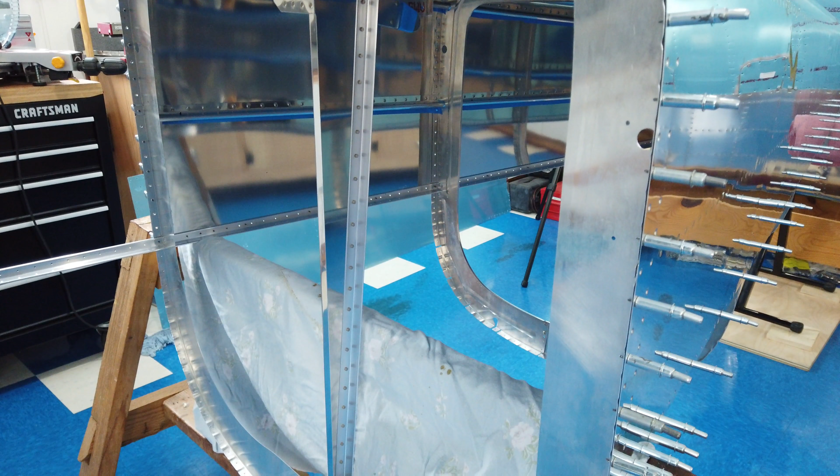Prior to doing that, I riveted this bulkhead in place. Let me see if I can get my hand in here. This bulkhead here, I riveted this in place, not along the edges, just this center part here. There's a brace that runs up in here. I riveted that to the skin. You might be able to see that here. I don't know if you can see those rivets. There's a line of rivets that run through here. I riveted that, and I also did some riveting in this area in here.

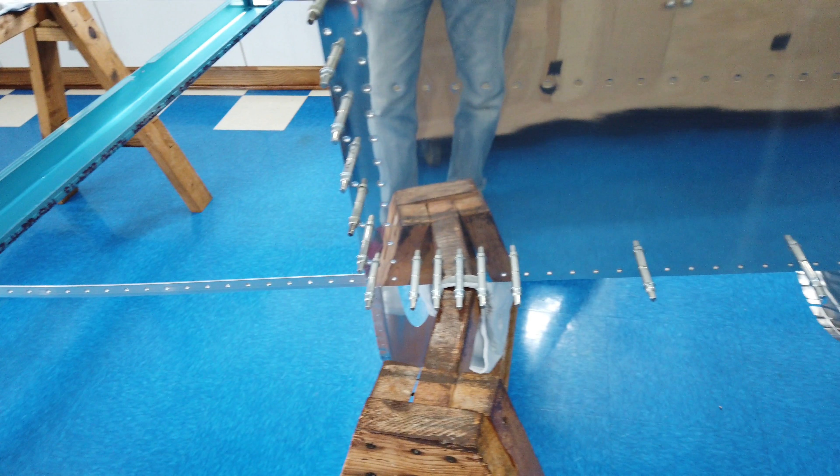So that was done first after I cleaned everything, which I've already talked about with the blue tape and the cleaning. Then I machine countersunk the longerons, which I may or may not have talked about. I think I have. I had done the machining on my drill press. Then I put the longerons into the tail cone, and then I flipped the tail cone upside down, which is how you see it currently, of course. And then I started on the center section.

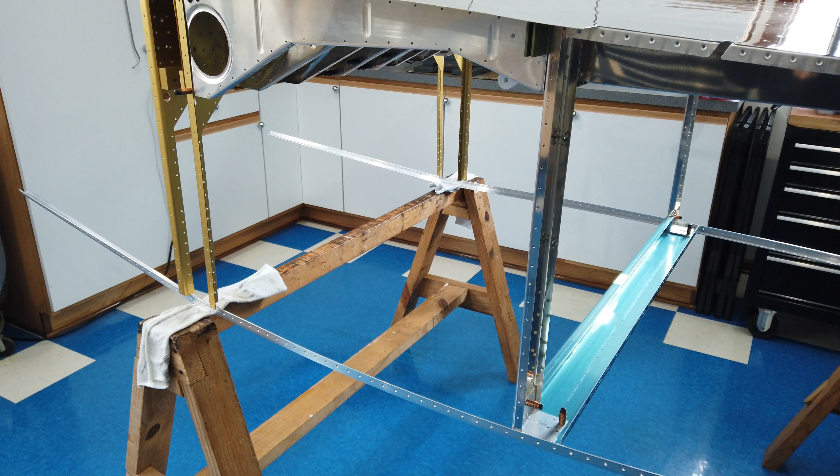Now remember, I talked about having notes written all over the place. So I paid really close attention to my notes, cleaned everything really well, made sure that all of the holes that were drilled when the skin was in place, all the match drilled holes, on both sides of the hole, those were deburred. Whatever notes I had written, tweak this, tweak that, I made sure I took care of all of that. I checked and rechecked the plans, both the drawn plans and the written instructions, just to make sure I hadn't forgotten anything.

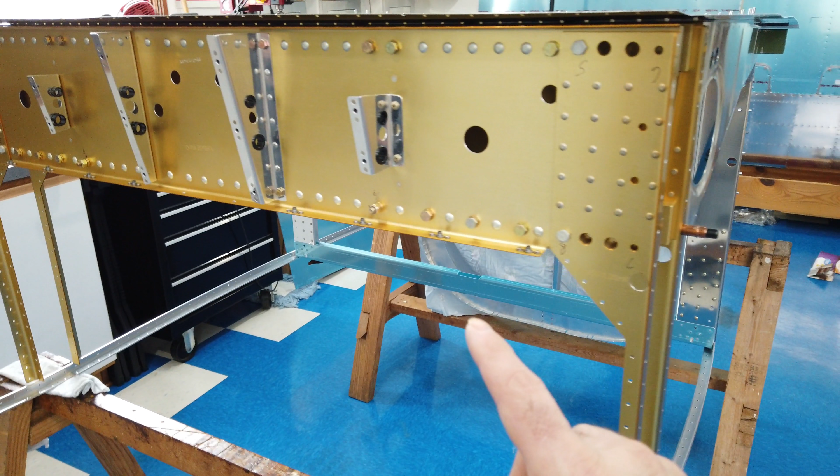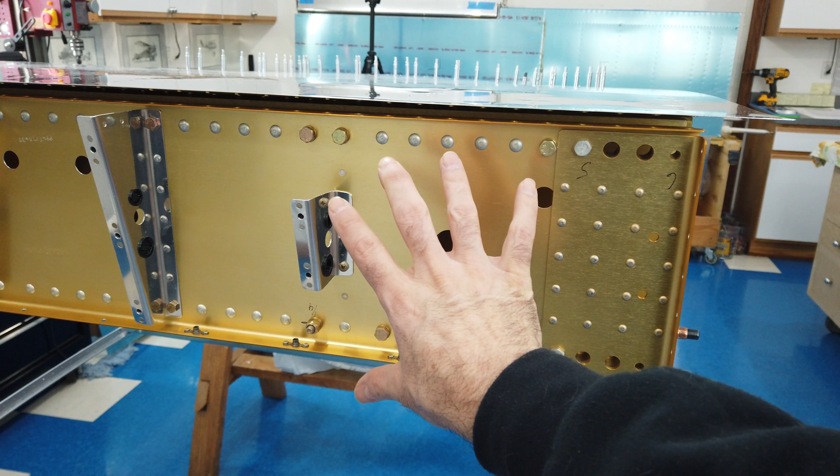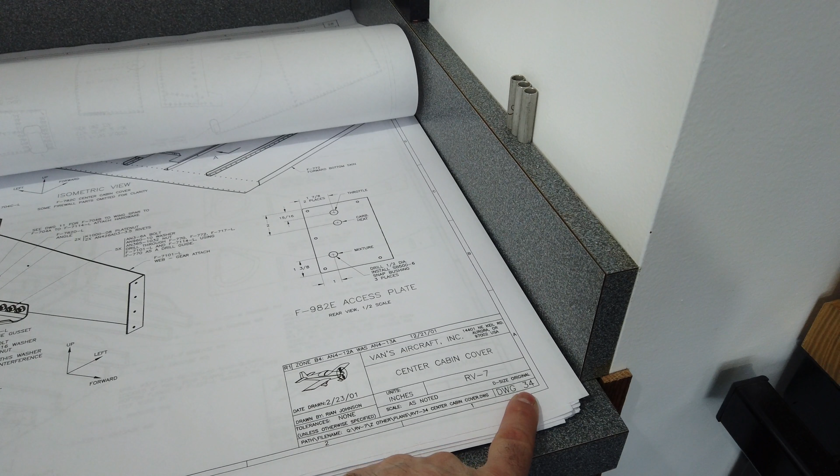If you're doing a tail dragger, which is what I'm doing, there are some bolts you need to be sure that you put in place. There are 1, 2, 3, 4, 5, 6 bolts on both sides. So it's 6 here, 6 over there if you're doing a tail dragger. Make sure you get those in place. And that is actually shown. Let me see if I can flip through this quickly here. Oh, here it is. So that is drawing 34, and it's in this fuselage gusset area. It shows you the bolts here. There are 3 here, and these 2 here, and this one here. So those are the 6.

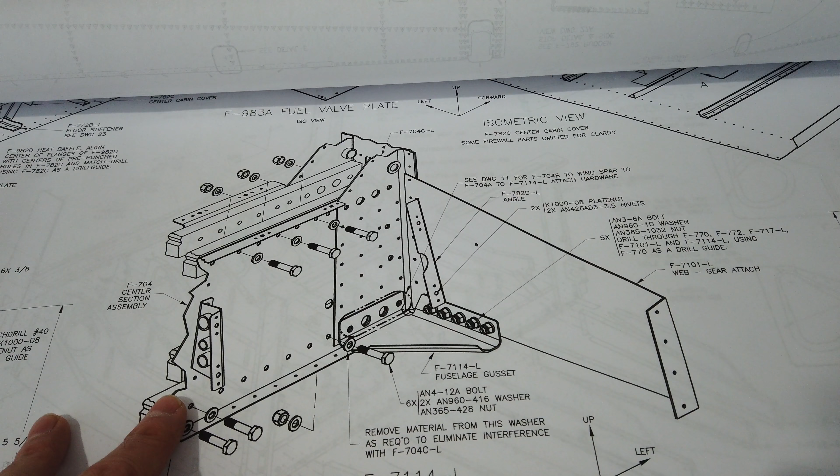And you can see that's called out somewhere that it's for the tail dragger, I believe. But anyway, drawing 34 is dedicated only to the RV7, so that is the tail dragger, and this is dedicated only to the tail dragger, so that's why these bolts are shown here. So, like I said, go through the drawings, go through the written instructions, make sure you haven't missed anything.

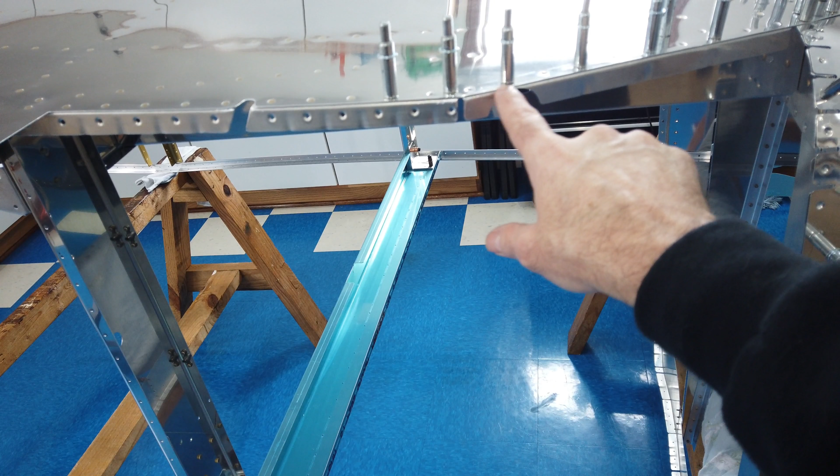Once I got the center section cleaned up, I brought it over, put it in place, put some clecos in it. I started riveting this corner brace that's in here. I got some rivets in that. These rivets here cannot be put in yet because the side skin goes up underneath here. So I wanted to leave some rivets open so I can flex the skin to get the side skin to fit underneath it. Make sure you dimple things that need to be dimpled. Make sure you seam the flanges to make sure that they're square, dimple, flute, anything like that. Go very slow, very methodically, take your time.

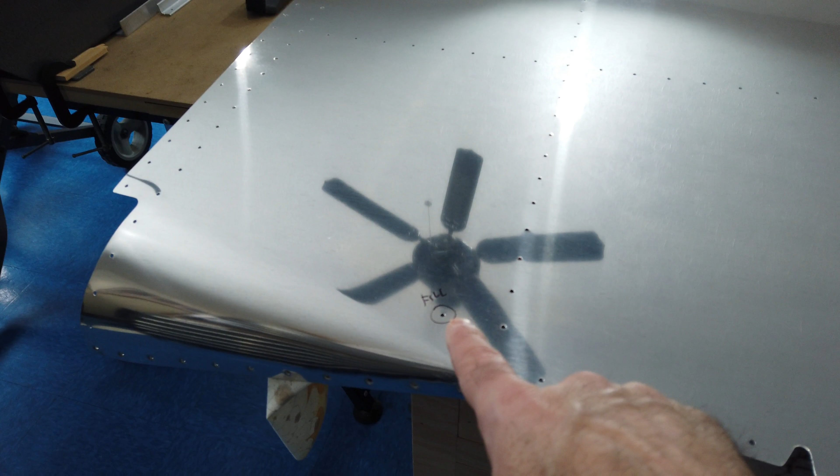So now I've got the center section up, tail cone up. I'm currently working on the side skins. This skin here is almost ready to go. I deburred, edge finished. Again, I paid attention to my notes. I had to make sure I got these holes in the right locations and the right size. I made a note here. I am not doing a step at this time, so this hole gets filled with a rivet.

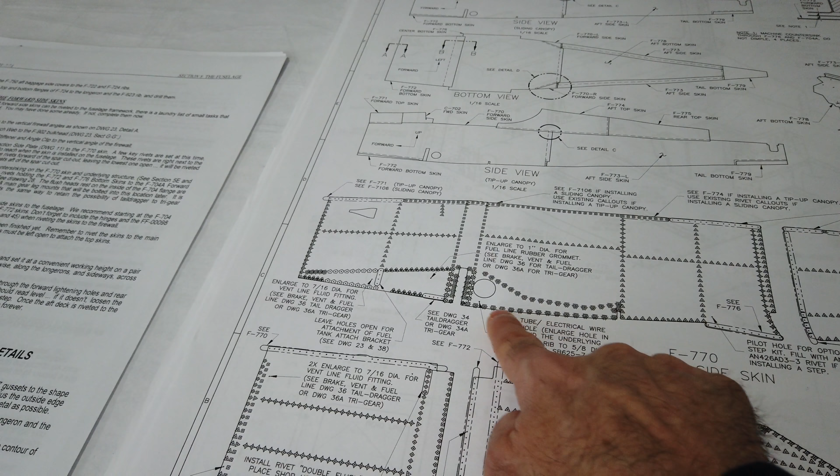Pay really close attention to the call outs for the rivets, because a lot of these rivets were match drilled when the skin was on the fuselage, but when you look at the call outs, a lot of these are not flush rivets. They are the 470 rivets, which are the domed head. So in certain locations, you don't need to dimple the skin. And I have those marked just with a marker. I don't know if that's going to show up, but I've outlined the areas. Anything within those outlines do not get dimpled.

And then there are a couple of areas such as this and this, which I have circled. They don't get dimpled either because they use the domed head rivets, or because you don't put any rivets in when you install it. There's other brackets and stuff that needs to go in here, so you don't do any rivets. You don't dimple, you don't rivet. You have to leave that open for future attachment. So that's what I've just finished. I marked off the locations that are not going to get dimpled.

And next up is to dimple. So everything else that is not marked on here gets dimpled, either a number 40 dimple or a number 30 dimple. So that's what I'm getting ready to do now. There's my setup. Of course, I use this bench as well. I just lay the skin right across here. So I'm going to dimple this thing, and then I'm going to try to get it up on the fuselage and clecoed, and then I'll do the other skin. All right, moving on.